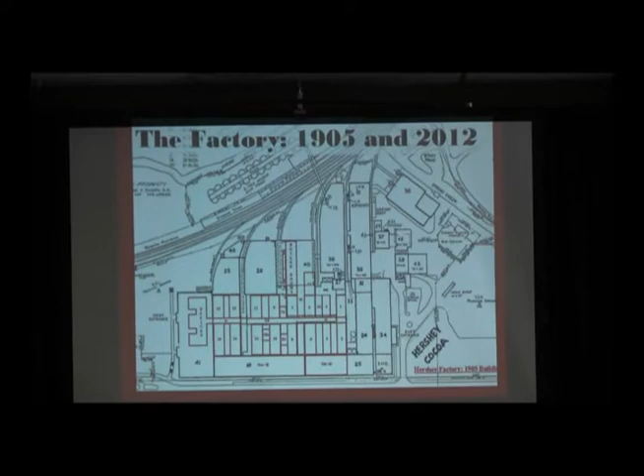You probably won't be able to see the numbers - these are building numbers at the back. But anyway, we had the original plant, which is basically one-story buildings, and they cover a certain area, I think 6 to 8 acres.

So what I did was take the current plant that exists - I'm going to use this. That's the current plant factory. Here's Chocolate Avenue down here, here's your Hershey cocoa bushes. The black boundaries or lines, that is the current factory, and the red indicates the original factory. You can see how small it is compared to the current one. It's not exactly to scale, but it's pretty close.

And then I had the numbers - buildings are numbered 1, 2, 3, 4, 15, 16, 18, and that was another thing I found when I started working on it, the buildings were numbered 41, 23. What's the numbering about? Oh, I think that's the year it was built.

It didn't always coincide. In fact, even some of the top managers in the plant would give tours and say, 'This year it was built.' That can't be right. So what I did is I went back to the original 1905 plan layout, and then you see it.

There's 1, 2, 3, 4, and everything makes sense. Your earliest part of production starts here. That probably was the receiving and storage for cocoa beans and other materials, and it progressed through to finishing and wrapping, then out to shipping. The original track, or siding, track number 1, ran here.

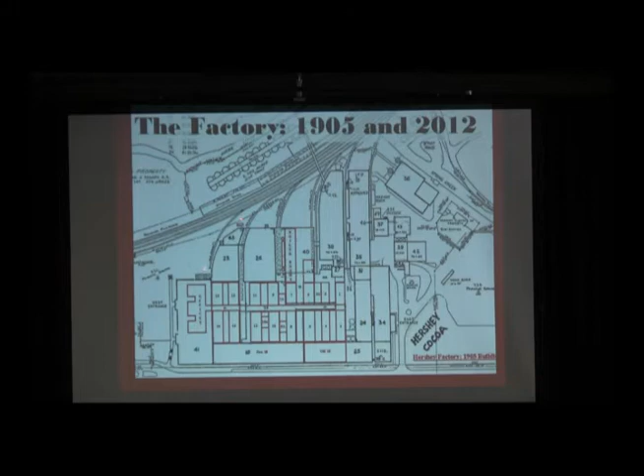Thank you, sweetie. This is the next photo.

And as far as I know, those blueprints are still over at the plant. Lisa Sherrod and I were trying to hopefully get them, save them, but they're in one of the buildings, the old engineering building.

All right, thank you.

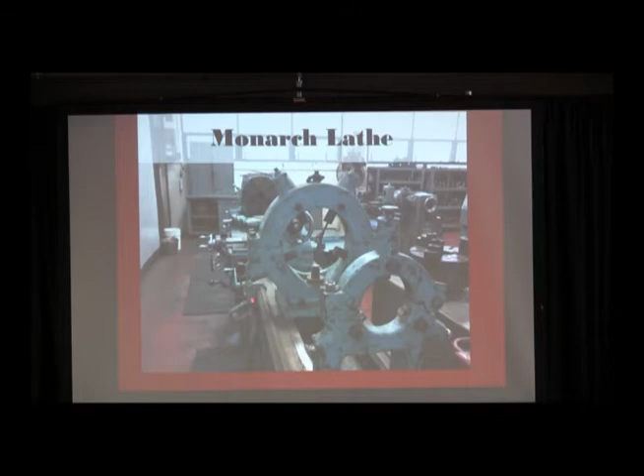This is actually a lathe that was just sold at auction, I don't know how much it went for. This is a Monarch lathe, that's a manufacturer. They had several of these, it's in the central shop, it was in the central shop. I was told, and I checked the plate on it, they are from the 40s. I was told these were given to the Hershey Chocolate Corporation as a thank you from the government for World War II, for making firing pins in the machine shop. So someone got that at an auction, it's a great machine and they probably got a good deal on it. Most of that stuff went out.

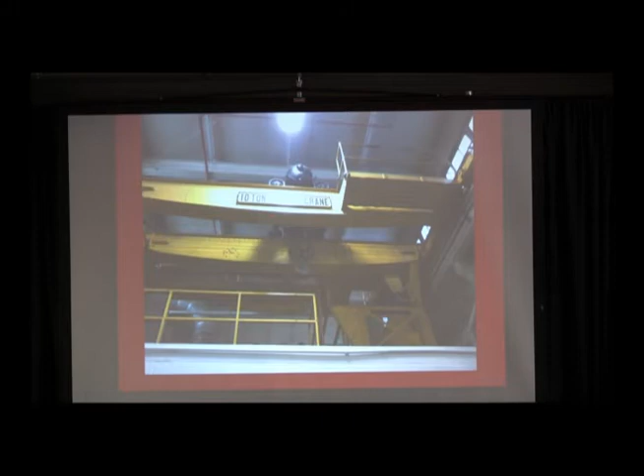This is another image in the central shop, again at the east end of the plant. It's like a 2-story structure. That's a crane that runs the length of the building, a 10-ton crane, one of the small ones they have in the plant.

And that's the roof of the central shop. This is what they call a monitor-style roof, where the central section is actually raised, and along here there are steel I-beams that allow the crane to roll up and down the length of the building so they can move heavy equipment. That space up top allows room for the crane to move and also gives extra windows for lighting.

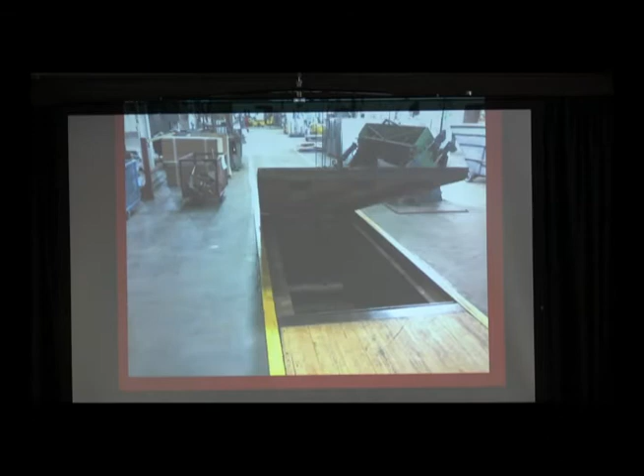This is also the central shop. That's a pit. I don't know if I was told, I don't know if it's true, because I couldn't find any remnants of tracks. They might have worked on trolley cars in there, but what they most likely did was work on trucks and vehicles belonging to the Hershey Corporation. These panels lift up, and you can just climb down there and work underneath, because with a big truck or something like that, you won't be able to put it on a hoist, so it's easy to just climb down the pit.

I had one of the guys in the shop take one of the smaller cranes and lift it up for me so I could take an image of that.

Next slide, please. There's a pretty nice image.

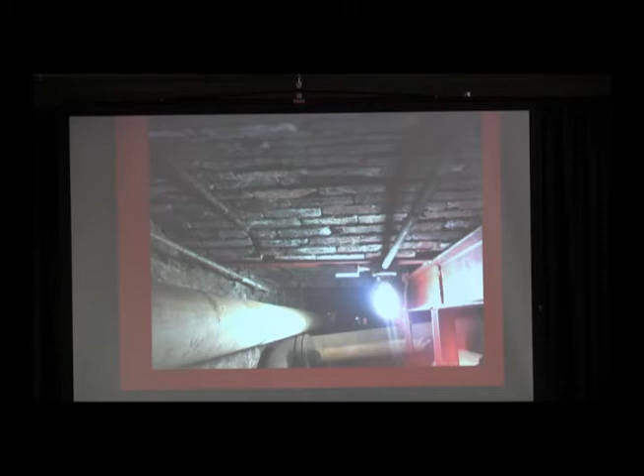This is in the main hallway of the plant, and you see these arched brick ceilings they have in there. Now, I see it's reinforced with steel. I don't know if that was original, I doubt that was. They might have had timbers in there at one time. But these huge forklift trucks go up and down this hallway on top of that, and they don't move, so they must know what they were doing.

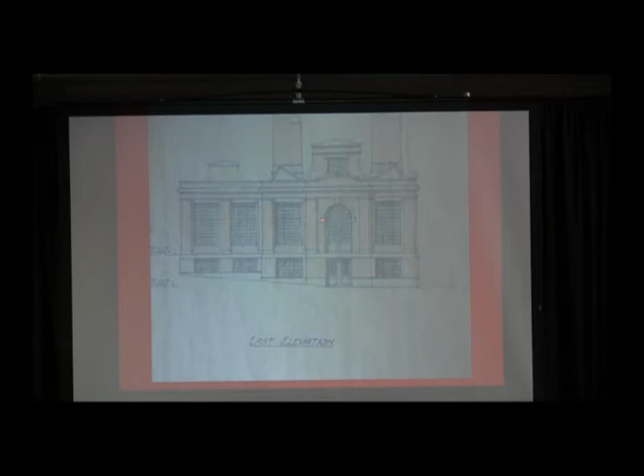Next slide. There's another depiction. It's not the one they went with. The new powerhouse that's there now only has 1 smokestack instead of 2.

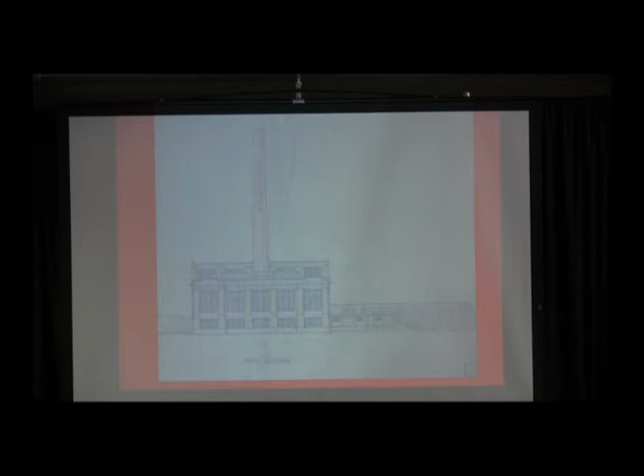That's a cross-sectional view. I'm just intrigued by the first thing about the powerhouse, but that's a cross-sectional view of it. That half is the south half towards Chocolate Avenue, and this is the north half towards here in this direction.

And on the right side, they had these - these were new. They didn't use dynamos anymore, they used turbo generators, and steam directly turned the generators. They were a General Electric system that they used. And they had a condensing system for that.

They had their boilers on each side of the big boiler building, and then they had a place on top where they stored the coal - a coal bunker. It could store 700 tons of coal.

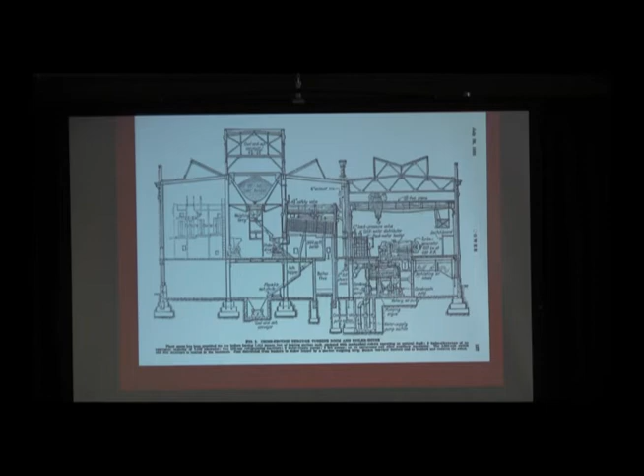And then they had a system where they removed the ashes and sent them down a chute, with a bucket conveyor to remove the ashes out - they weren't shoveling the stuff anymore. They had a system where larries would weigh the coal exactly, because you had to know how much coal you're putting in, so you knew how much heat you're going to produce. And it had to be exact, because it could also get pretty dangerous.

Next slide. That's the original - Edge Moor was a company, the Edge Moor boilers that they used. I believe the coal went in here. There's the coal bunker on top. These are the stokers on the side. And then the coal would go in here, and the ashes would go down below.

Next image. That would have actually been up on the top of the roof. And those are the conveyor system, the bucket conveyors to move the coal and the ash in the plant.

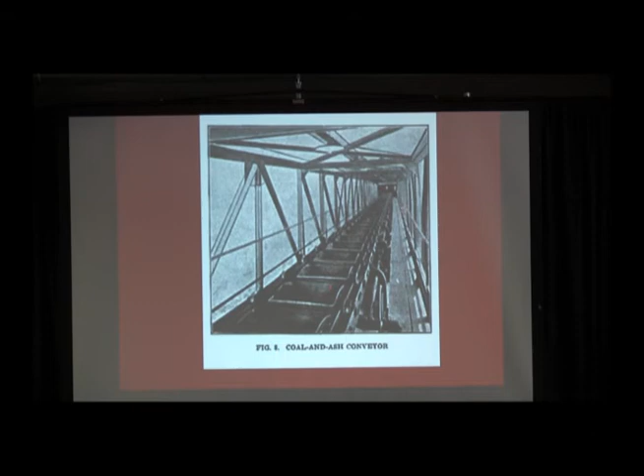Obviously, that's smokestacks. They're 250 feet high apiece, and each one of them weighs over 1,200 tons. So what's that, roughly? 2 million pounds? Okay, next slide. And that's track number 9.

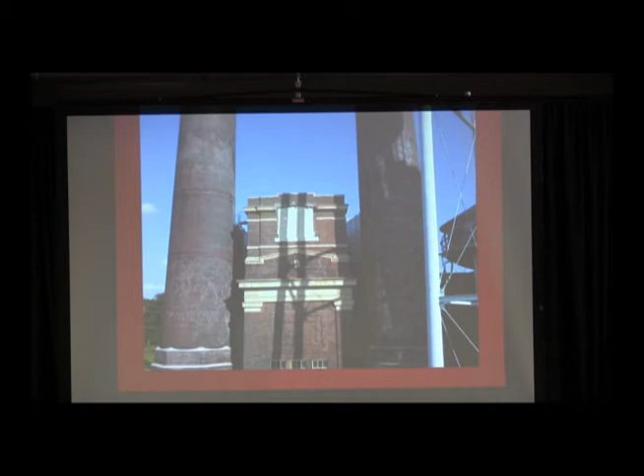Now there's the back of the powerhouse. Somehow that was open at one time - I believe they moved the ash, the coal ash, from out top, and they would take it across and load it on cars, and get rid of it.

And then that's on the ground floor of the powerhouse. There's a staircase that goes down below because the conveyor belt system ran underground - on top it also ran underground. And there's a hose, probably because they're pumping water out of it. They haven't used it in a while, but it's constantly flooding. I didn't go down inside, but that staircase would take you down into the tunnel where the conveyor belt was.

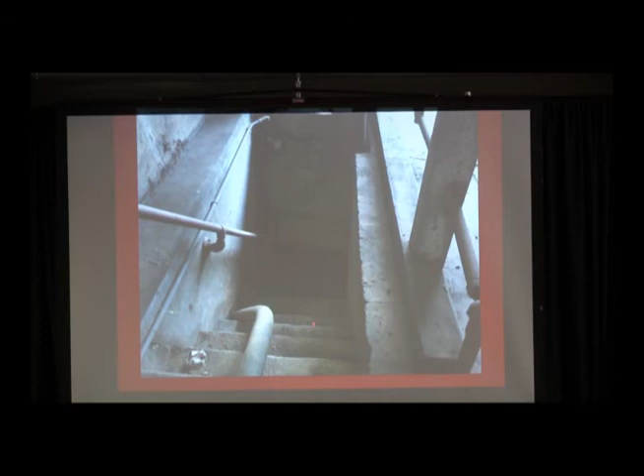Next slide. Again, this is the ground floor. I found these metal tracks, like little railroad tracks running there. They would have been for the ash hopper that ran on the tracks with 4 wheels, and they would take it to each boiler, and then the ash would come out and go down a chute - this panel over here wasn't there. They'd dump it in there, and it would go down below and get to the conveyor system, the bucket conveyor, to get the ash out of the building.

And the lighting in there is horrible, but the coal bunker is still there. It's huge, it looks like the bottom of a ship. It's hard to tell, but it looks like the coal would come out of here when they were loaded on larries, the weighing larries.

Next slide. That's a coal bunker on the one they added on the east end. I get a view of what a coal bunker looks like.

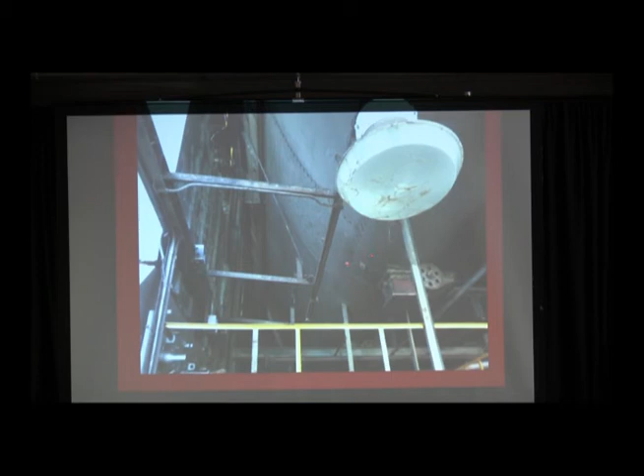Next slide. And that's the ground level of the first floor. I'm far from an expert, but I'm pretty sure that's a boiler, because they call them tubular boilers. I'm pretty sure it's one of the original boilers that was in there. It's still there, and that's all brick, it's all fire brick. And there's a huge combustion chamber.

Like if you ever remember having a coal furnace, you load coal in there, and it's pretty decent size in your home. But when you go through those old combustion chambers where they load the coal, they're huge - you can park cars in there, that's how big they were.

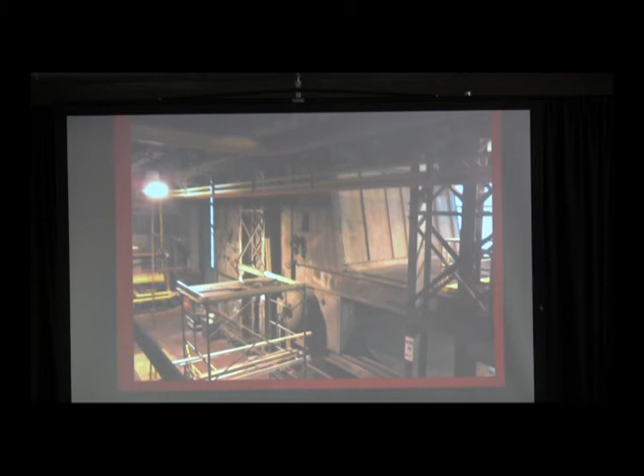Next slide. That's on the engine room side of the factory. This again of the powerhouse, and that's where they had the turbo generators. And then again, you have another - I don't know what the maximum capacity on that, but there's another crane going across.

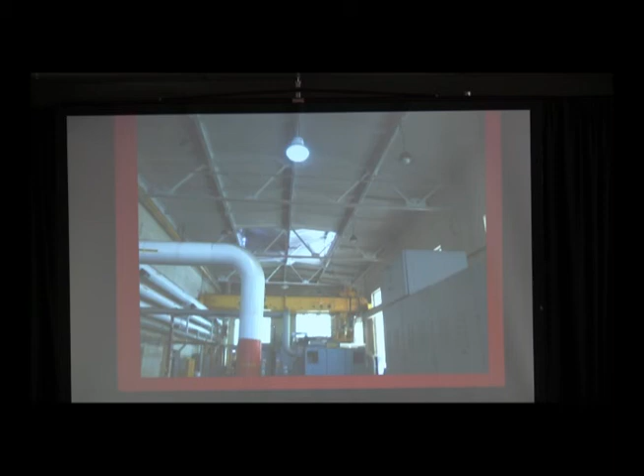They recycle all that concrete, make use of it - it's actually cost effective to recycle it. And they separate the steel and other debris. Apparently they use magnets to get some of the steel out that they miss. You can't see, but they recycle all that material.

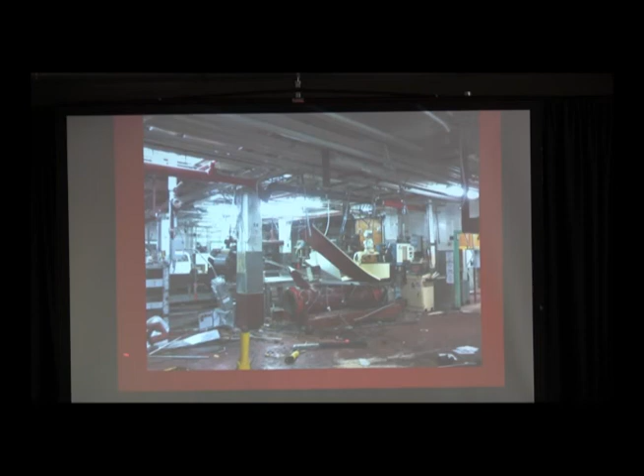I thought that was a neat image. That went up in there - the little red pipes took water for the fire suppression system.

Go back one, sweetie - I just want to say this real quick. You say, why doesn't the building fall over? Normally in a home, your exterior walls are load-bearing. The way this plant was built, all the columns were load-bearing. You could take out the floors, the walls, and the roof, but they would still stand up. That way, if you wanted to put an addition, you could just simply tear a wall out - you're not going to affect the integrity of the building.

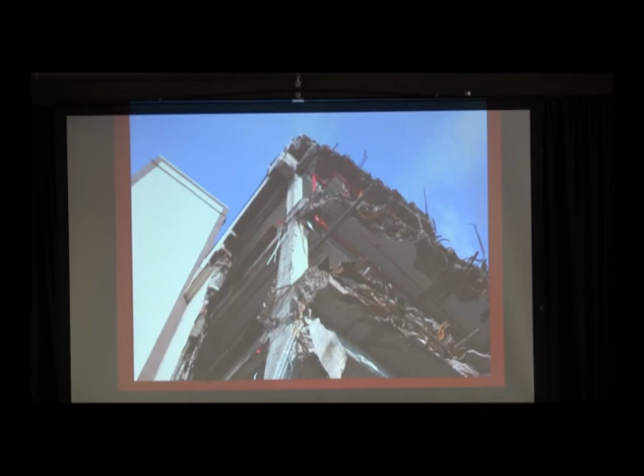This is where Building 28, the second powerhouse, once stood. This is the area of debris. That's Building 18 - that's going to remain.

Oh, that's it. The end.

Do we have any questions that I may or may not be able to answer.

Tom asked: what happened to the conches - are they still in there, or are they going to save any of those? You know what, I don't know, I don't know what the plan is. I know they do have the old original conches, the short ones. They had the big long ones, and they'd call that area longitude because they had the long arms - the long conches. I do not know what the plans are for the big ones. They're huge, just huge. Plus they have granite, they're lined with granite, and they have granite rollers. So I don't know what they're doing with those.

What did they do with the ashes? As far as I know, they hauled them away on rail cars. Besides that, I don't know if there's any additional information.

When was the last building built, what year? I have a cheat sheet here, let's see - list all the buildings and dates that were built. Oh, that would be what they call Building 45. If you've been in Hershey a long time, you remember they used to have the greenhouse over on Derry Road, and they tore that down about 1960, and they built a building - that's Building 45. They had so many cocoa beans they needed storage, they had cocoa beans stored on the side, and they even needed more space, so they built an extra building to store their cocoa beans. Now it's Building 45, and later on that became the building where they processed the cocoa butter.